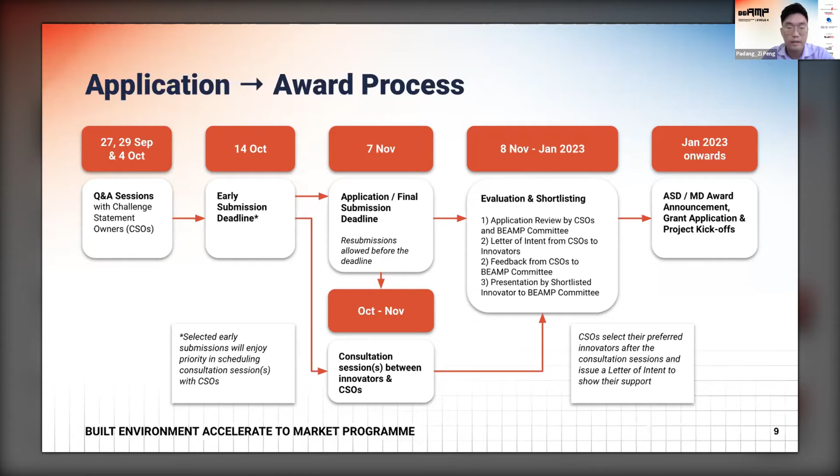There are two development tracks for BEAMP, and you will need to apply for the appropriate track depending on the tech maturity of your proposed solution to address the challenge statement. Please note that we also welcome applications from innovators with well-developed solutions, and can help facilitate direct tech matching with our challenge statement owners.

Let me explain both tracks so you understand which to apply for. If your company has just discovered the challenge statement or is in early stages of developing a solution that could address any of our challenge statements, you should apply for the Accelerate Solution Development Track, or ASD for short. The proposed scope of development for ASD should be planned to be completed within 3 to 6 months. Examples of activity include user studies, tests to ensure usability, developing prototypes or running simulations to demonstrate technical feasibility and accuracy, aligning the solution blueprint and pilot implementation plan with stakeholders, or conducting a cost-benefit analysis to ensure viability.

BEAMP will help subsidize your development costs. Funding support for the ASD track is capped at 30,000 Singapore dollars, or 70% of the qualifying costs.

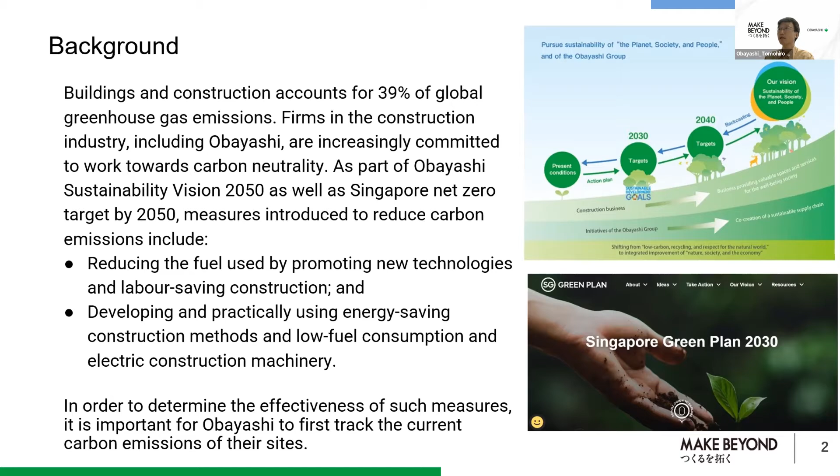Next, I would like to explain current practice. Currently, there are no established practices of collecting site-level data related to carbon emissions. When I talk about fuel purchased directly by Obayashi, we can collect data from fuel suppliers' invoices without description, so we don't know how much fuel was consumed by each machinery.

When I talk about the fuel purchased by suppliers or vendors, we can rely only on their reports, either under Scope 1 or Scope 3, which is difficult for us to judge their correctness. It is very difficult for me to justify the quantity of fuel which suppliers or vendors allocate to our site.

So to collect carbon emission data more accurately, which comes from fuel consumption, if Obayashi were to implement new practices that involve manual data collection, it would be too time-consuming, and also that data may not be so reliable due to human factors. Obayashi wants to reduce both direct and indirect carbon emissions. Indirect carbon emissions are contributed by other companies operating on our site, such as subcontractors and suppliers, which fall into Scope 3. Regardless of whether the carbon emission falls into Scope 1 or Scope 3, we consider it important to capture accurate data to determine effectiveness of measures for reducing emission.

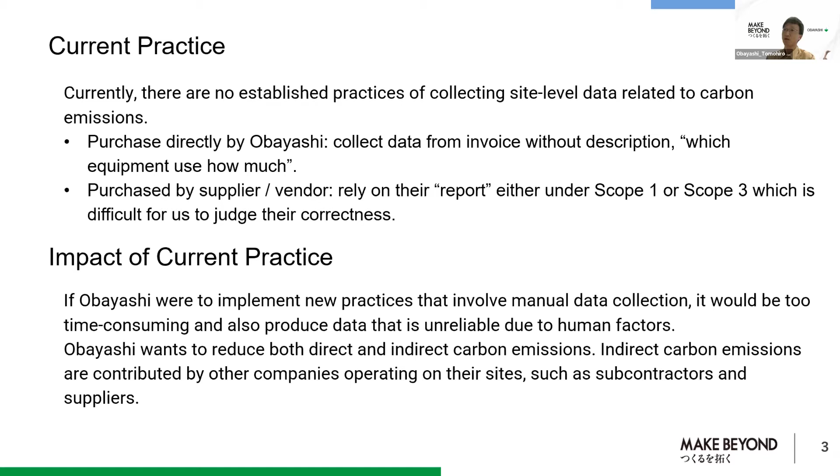The opportunity, we are interested in solutions. Interrupt, I think it's quite hard to hear your presentation, perhaps you need to speak louder. Okay, can you hear me? Yeah, better. Okay, opportunity.

We are interested in solutions that can automatically collect site-level data related to carbon emissions. The data of interest include: first, carbon emissions produced by logistic vehicles, for example dump trucks and lorries, which can be estimated by determining the number of vehicles operating on site and their fuel consumption. Second, carbon emissions produced by construction machineries, for example gensets, tower cranes, and excavators, which can be estimated by determining the number of machines operated on site, type of operation, and their energy consumption.

The solution can adopt AI-based visual analytic methods on existing site surveillance systems to collect the data mentioned above for all companies involved, without requiring site-wide modification of vehicles and machineries. We are open to adopting new surveillance systems that can support effective and accurate collection of data.

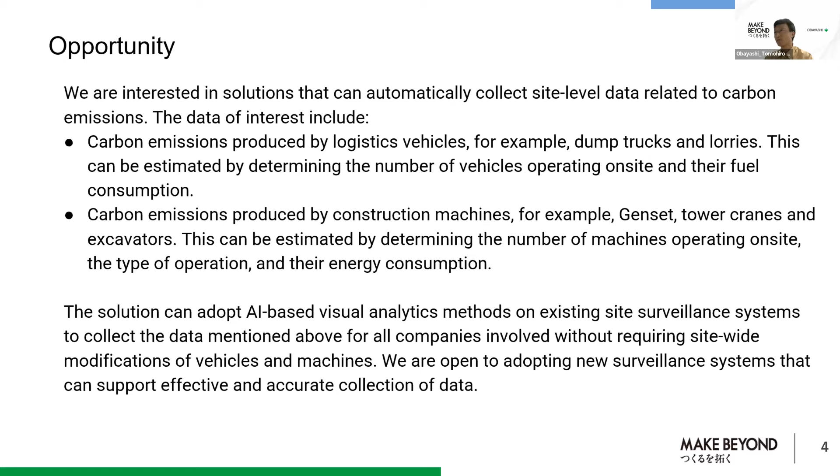In order to better plan measures and promote collective action by all stakeholders, it is useful if the data collected can generate the following insights. First, breakdown of carbon emissions based on company, which can help categorize the emission into Scope 1 and Scope 3. Second, breakdown of carbon emissions based on vehicle or machinery type and model.

Third, identification of operation abnormalities that could lead to higher emissions, for example smoke generated from a faulty machine. The solution can be integrated with project management or logistic management platforms to produce more accurate carbon emissions data on the project site. It would include a dashboard to visualize the data collected and produce useful breakdowns of carbon emissions.

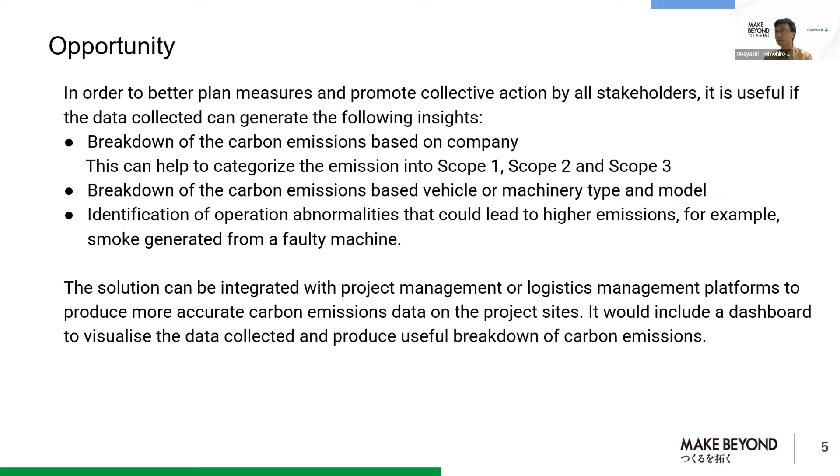Lastly, I'd like to talk about expected outcomes. A carbon emission tracking system collects and analyzes the emission data of every vehicle and machine on the whole site, regardless of its owner. Data has breakdown based on company, so most probably we can automatically classify each emission into Scope 1 and Scope 3. Also, the data will support decarbonization measures.

The solution would be part of Obayashi's effort to develop a carbon emission tracking system that can consolidate and track all our direct and indirect carbon emissions. And when this solution is used widely, it will contribute to us making proper efforts to reduce carbon emissions, not only for Obayashi, but for all firms inside our construction sector.

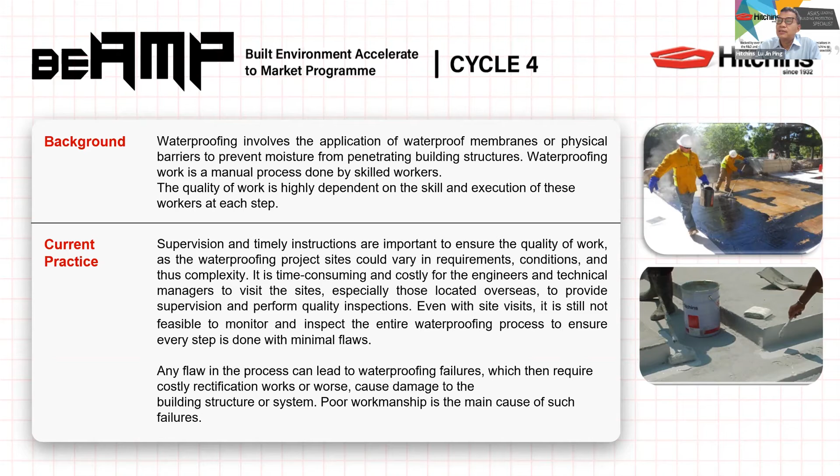So the opportunity is an intelligent remote monitoring system that enables remote monitoring, inspection, and instruction of the workers. The solution could even improve the waterproofing process to help workers consistently achieve good quality of workmanship. It will ultimately help reduce the need for our engineers and technical managers to be on site to assure the quality of waterproofing work.

So the solution we want could be an Internet of Things device installed on site, attached to the workers or both, and must fulfill the following requirements: it must be easy to set up and not obstruct or interfere with waterproofing activities, and it must be able to monitor activities for the entire surface area that requires waterproofing. It must also work for different waterproofing products.

But at this moment we are prioritizing only 3 products. The application and installation method can be found in the respective brochures. Number 1 product is Traffigard, for roof. Number 2 is Formceal 3000X, for basement. Number 3 is Formdex Uni, for wet areas.

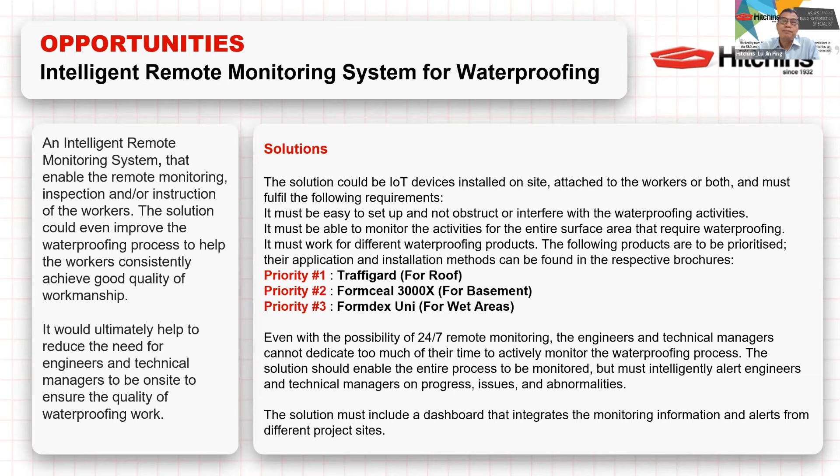So the outcome expected is an imaging device that performs real-time remote monitoring of workers performing waterproofing activities, thereby reducing the need for engineers and technical managers to be on site. The data collected is analyzed, and relevant stakeholders are sent alerts regarding progress, issues, and abnormalities.

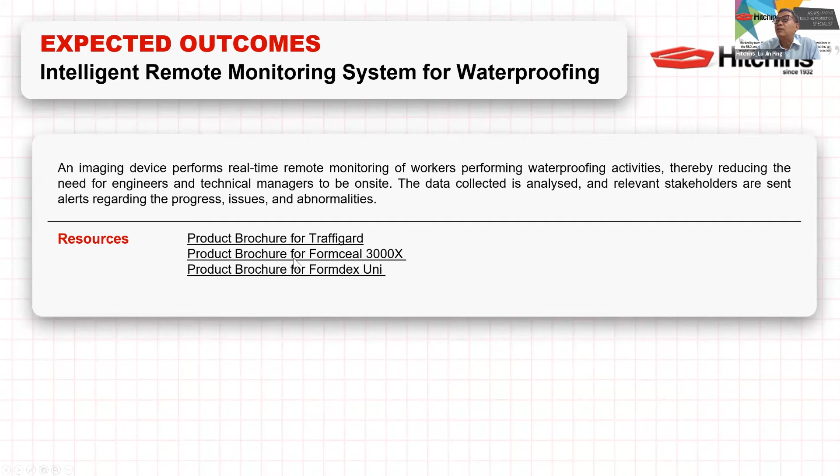So you can find the brochure of these 3 products from the link on the website, via Google Drive. I think on the BMP website this link is already available. I don't have too much time on this, but I'll try to summarize some simple application steps.

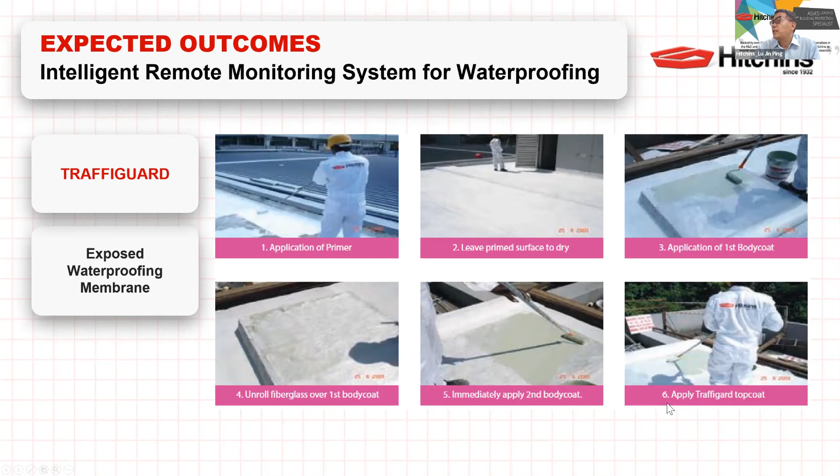For example, Traffigard: Step 1, apply primer. Step 2, leave the primer surface to dry. Step 3, application of first body coat. Step 4, unroll fiberglass over first body coat. Step 5, immediately apply second body coat. Step 6, apply Traffigard top coat. This is for Traffigard roof application.

Second one is Formceal 3000X. This one is for basement, underground projects, or tunnels. Step 1, apply bitumen primer. Step 2, laying of membrane on slab. Step 3, side and end lapping of membrane. Step 4, termination at the upturn. Step 5, laying of membrane on wall. Step 6, completion. This is product 2.

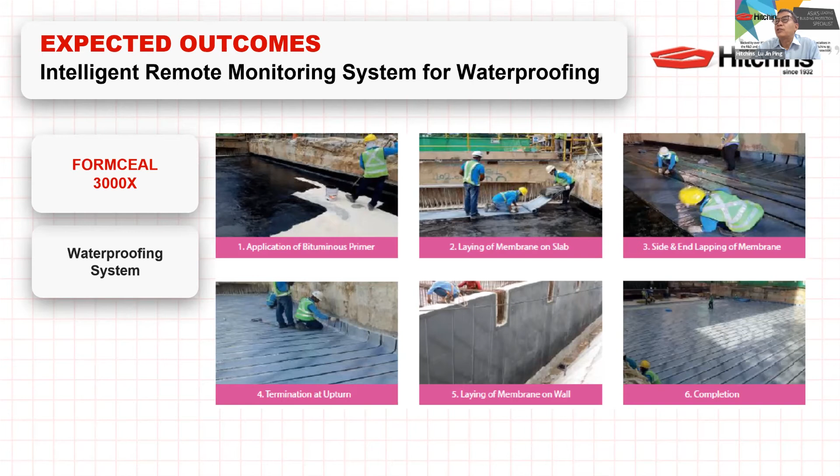Product 3, we call Formdex Uni. This is a 2-part cementitious waterproof membrane. Step 1, corner reinforced with fiberglass. Step 2, membrane applied to pipe. Step 3, termination at 300mm height. Step 4, membrane applied with roller. Step 5, membrane applied in 2 coats. Last step is membrane; some cases have to apply to 1.8 meter height, depending on the project.

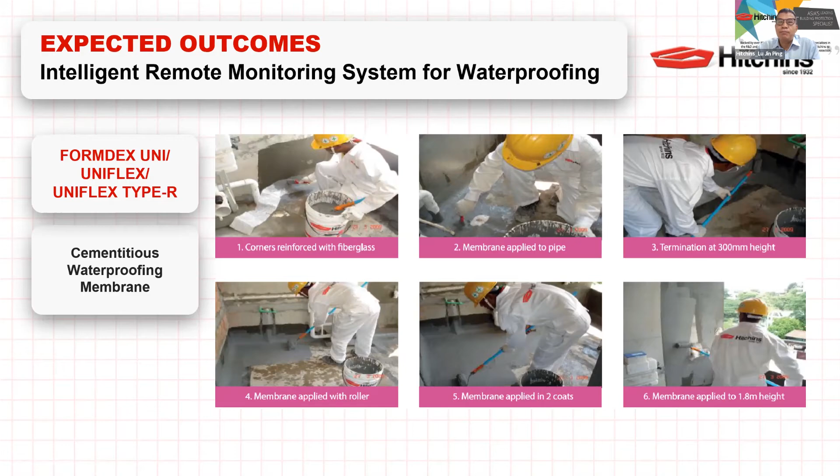Okay, this is all from me. So any questions?

Thank you, Mr. Lu. Perhaps I will ask a question of my own: what are the common workmanship issues for these waterproofing works? And just to help the innovator have a sense of what exactly they are monitoring of the workers.

Okay, well basically, for all the products we have a method statement. The problem is workers may not always follow the method statement. So a common problem is, let's say, some products we have to mix Part A and Part B. So how is it mixed? Whether mixed in the right proportion and the right time, or using the right tools, is sometimes a problem.

Second one is, you know, waterproofing is a whole integrated protection. Anywhere, if you never apply, then water will come in. So we must make sure the whole area, especially the corners and the sides, everywhere must be applied according to our instructions. For example, with some preformed membranes, we need to make sure there's overlapping and the joints must perfectly, you know, apply or protect it.

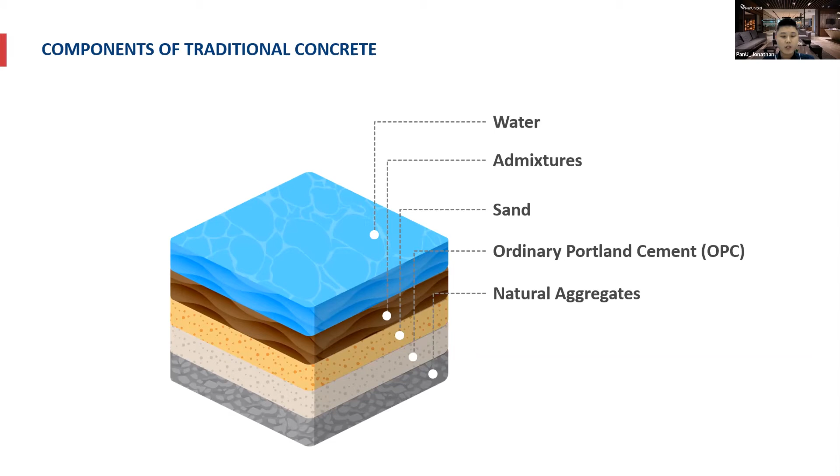Here's a little bit of Concrete 101, for people who aren't aware, since there's often confusion between cement and concrete. Cement is actually a key ingredient in concrete. Imagine concrete is like baking a cake that uses many ingredients - these are the 5 key ingredients that have been used to produce concrete up till today. To reiterate, one of the key ingredients of concrete is cement itself.

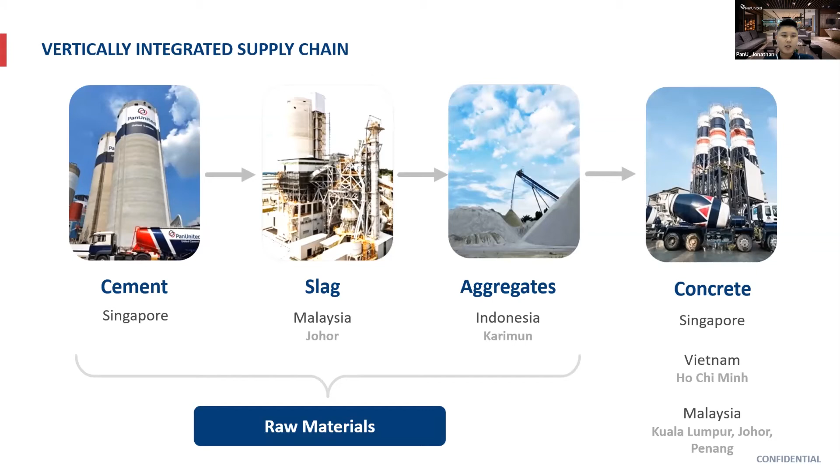Our operation covers the entire supply chain of our raw materials. On the left-hand side, we have a cement terminal located in Jurong port, where we store imported cement from Japan. Next to it, we have our slag grinding plant, also known as green cement, in nearby Johor, Malaysia. We also operate our own aggregate quarries in Indonesia, Karimun Island. Last but not least, these are all delivered to Singapore to make ready-mix concrete.

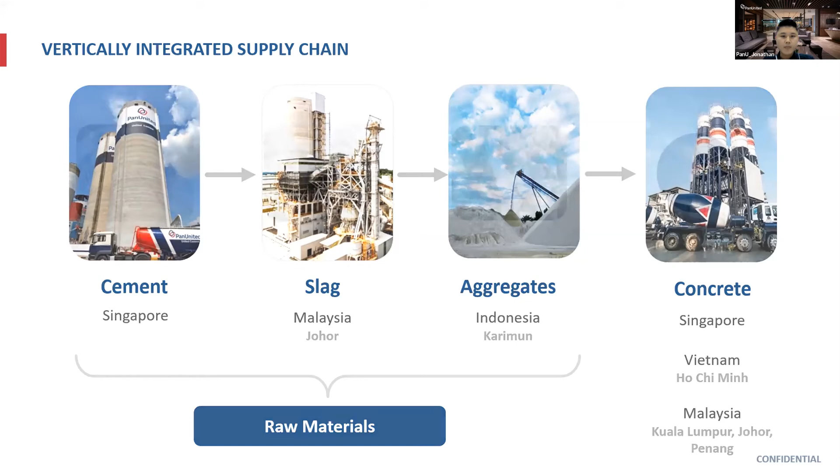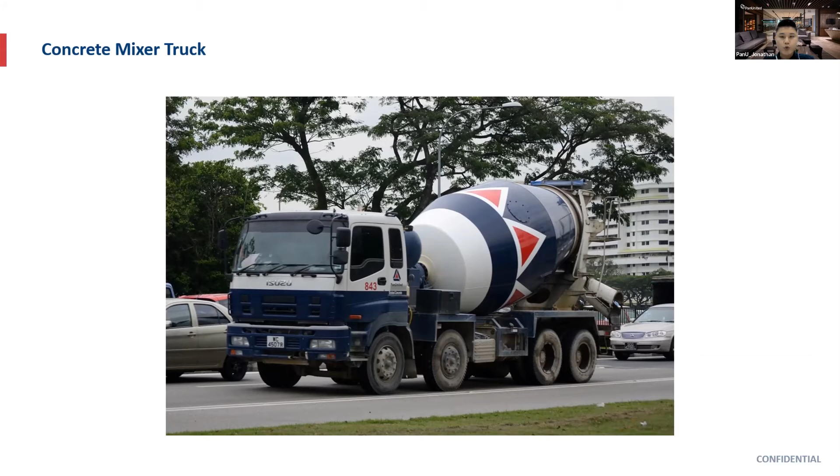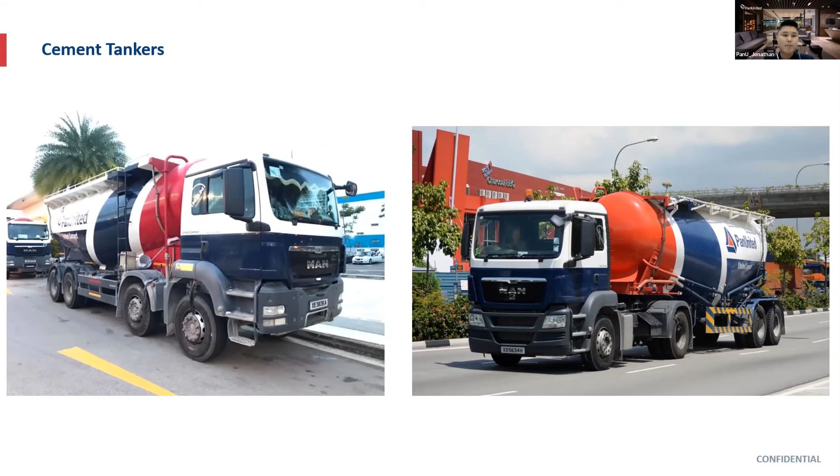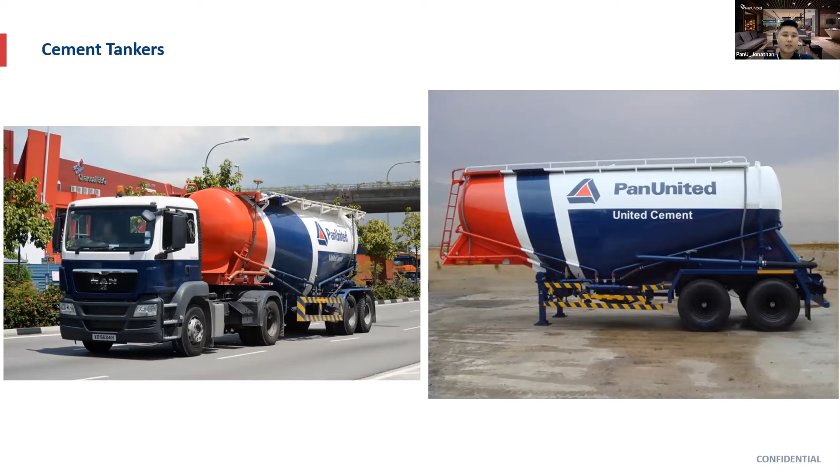Here's a snapshot of a typical concrete mixer truck. To avoid confusion, we are here to talk about cement tankers today. Here are 2 examples of cement tankers in our fleet. On the left-hand side, the cement tank is mounted on the chassis itself, whereas on the right side is a towed model - the tanker is by itself and will be towed by heavy vehicles. This is what they typically look like at our concrete batching plant, where cement is being loaded onto the silos.

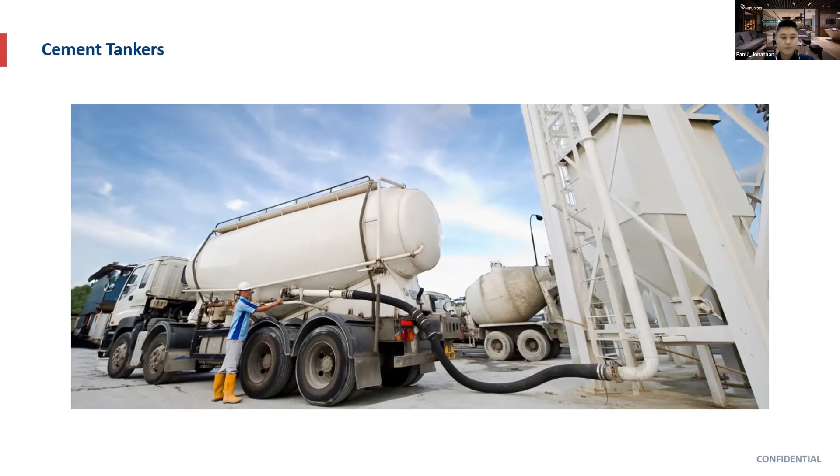Here's a typical unloading process of a cement tanker. First, the cement tanker arrives at the plant, pending whether there's a queue, since more than one material may be arriving at one point in time - there's a queue for the weighbridge. Then they take the incoming measurement, and next proceed to unload the cement onto the silos. After unloading, they queue again for the weighbridge, depending on traffic conditions and certain peak periods - materials may all come at one time, and we don't have control over traffic arrangements, especially from overseas sources such as cement from Malaysia. Last, they take the outgoing measurement to ensure what was reflected on the delivery orders is being unloaded onto our cement silos.

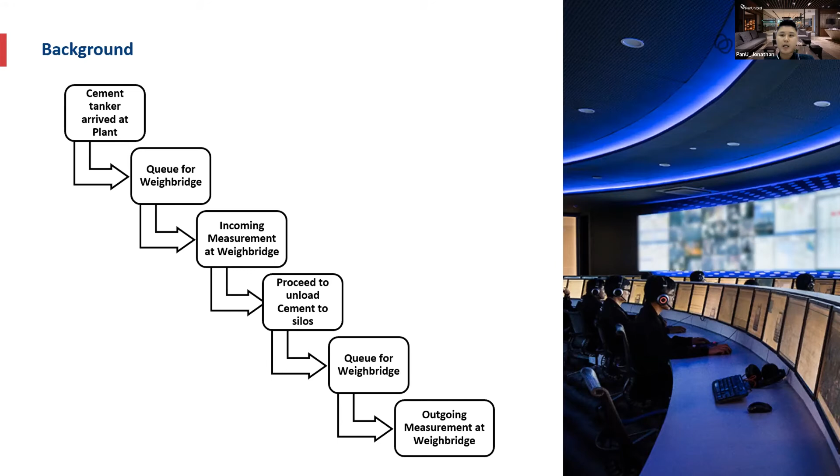To share a bit more about construction, especially in a concrete context in Singapore: the average concrete volume per year over the last 5 years ranges around 11.5 million cubic meters. In 2021, the construction demand was actually 30 billion Singapore dollars, and for the next 3 years it's forecasted to be in the range of 25 to 32 billion in average annual demand. This is largely because there are many upcoming major infrastructure projects, such as Stage 4 of the Thomson East Coast Line, our Cross Island Line, and even Changi Airport Terminal 5, to name a few.

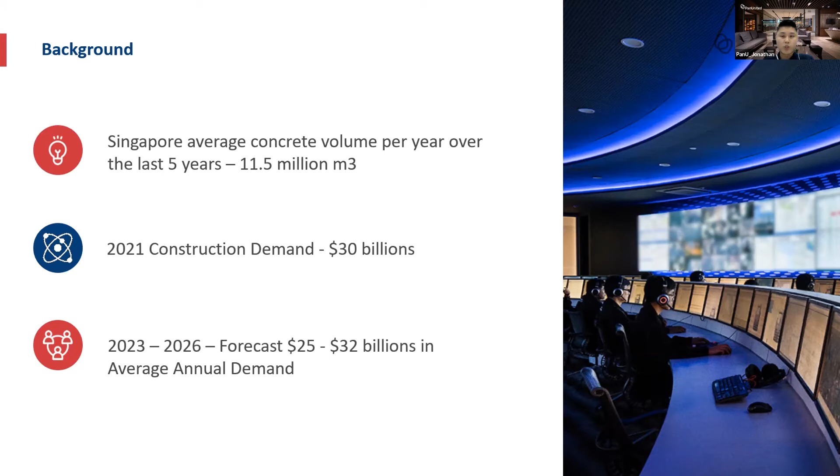So what are the opportunity areas and the key challenges that we would like to address?

First, you must be able to accurately calculate the volume of cement. Next, you should be able to identify the license plate of the tanker, as this will serve as a unique identifier. Ideally, it does not require the cement tanker to stop for measurement, ensuring smooth traffic flow in and out of the concrete batching plant. Last but not least, it should not require any installation of devices or sensors on a cement tanker, as we also purchase cement from overseas and external sources that we do not control.

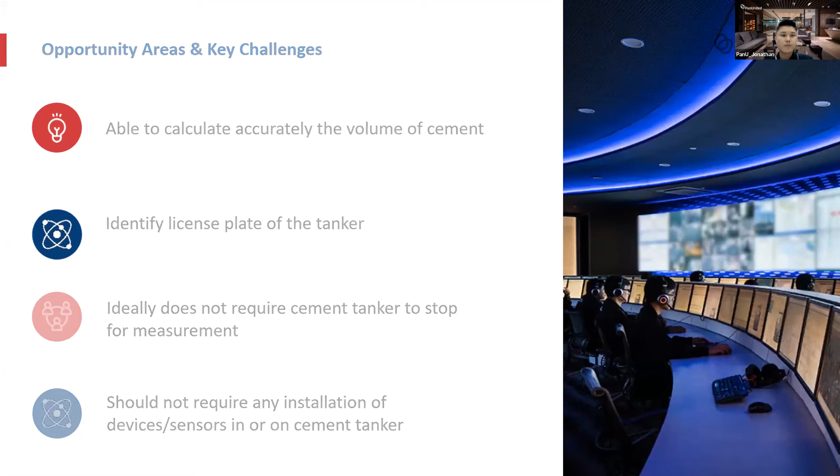In short, the solution should accurately measure the volume of cement, eliminating the use of a weighbridge in a concrete batching plant. For scalability, in the future we can consider also using this for delivery of different types of materials delivered by dump trucks or tipper lorries.

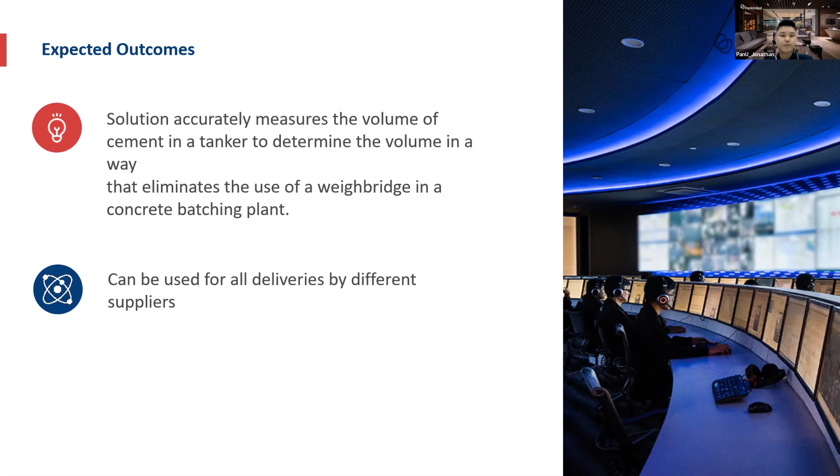So with that, I end my presentation here. Thank you.

Thank you, Jonathan. A quick question from me. For these challenge statements, have you explored existing solutions in the market? What are the learnings from exploring those solutions?

One existing solution is the X-ray radar system that ICA uses, but those are too precise and also too expensive, and last but not least, very bulky. In Singapore we also face space constraints, and much of our land is on short TOL, we do not have long leases. So ideally the solution must be able to be installed and dismantled in a quick amount of time.

Thank you, Jonathan. A question from Ivan: do you have a real-time fleet management software or live operators for concrete distribution? For concrete distribution, yes, there is - they are all monitored at our command center, and we have GPS fitted in all our concrete mixer trucks. But in this scenario we're talking about cement tankers. Cement tankers operated by Pan United Group will also have this visibility, but anything beyond our control, we will not have that sort of visibility.

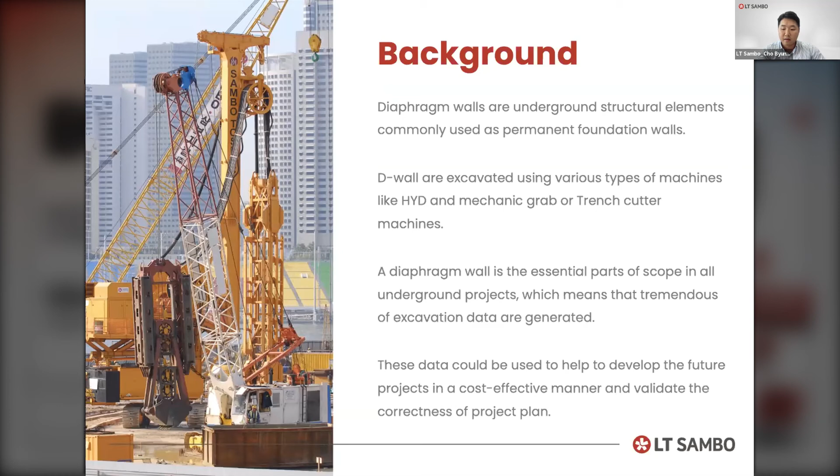As you probably know, underground construction such as bored piling, soil improvement, tunneling, and D-wall are all invisible processes underground, since we do not know what the soil condition will be before excavation. So before we carry out any of this type of work, we conduct a soil investigation to understand the ground condition for geotechnical design.

However, it cannot be completely conclusive, as we require additional data and must rely on the operator's experience and skills. The operator checks the soil condition using eye inspection and monitoring the machine's data to decide the best approach to operating the machine to carry out the excavation.

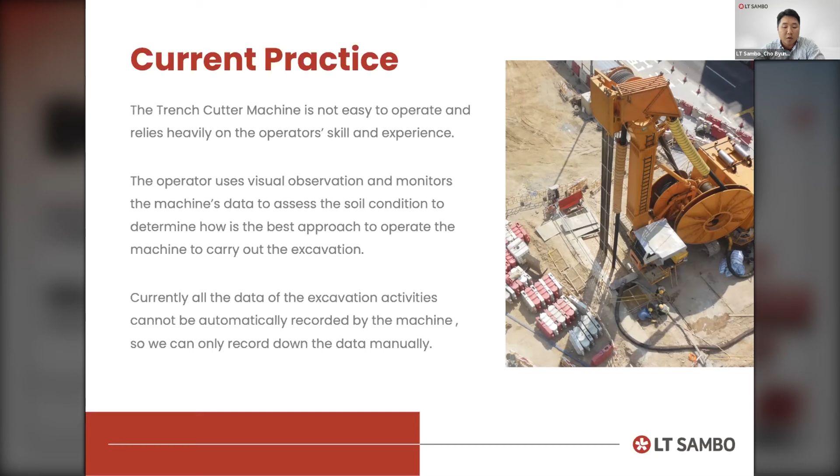For example, during excavation, if the main wire of the trench cutter, which can only be seen on the surface of the trench, is outside the lanes the operator has set up, it indicates that the verticality of the trench is out of tolerance. The operator could identify this when the monitor displays digital figures received from the vertical sensor installed on the trench cutter body.

The impact of the current practice is that the operator lacks sufficient sense of operation. So when the operator encounters tough soil conditions, such as a weak layer of ground or something like a rock layer, that differs from the data provided by soil investigation - for example, we conduct soil investigations before, then during the real excavation the data cannot be a 100% match.

So it takes longer time to excavate and causes additional problems such as trench collapse. As a result, site progress is delayed, becoming more time-consuming, and the cost is increased.

So as an opportunity - currently our LT Sambo has our own manual data collection system, such as average excavation speed or tool consumption. Tools means the tools already installed on the cutter body. Then operating hours, and which part of the machine requires repair - what kind of part of the machine we repaired before.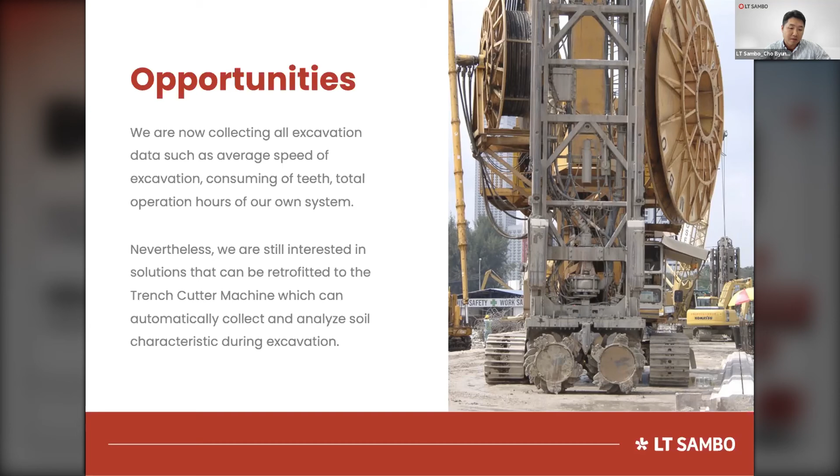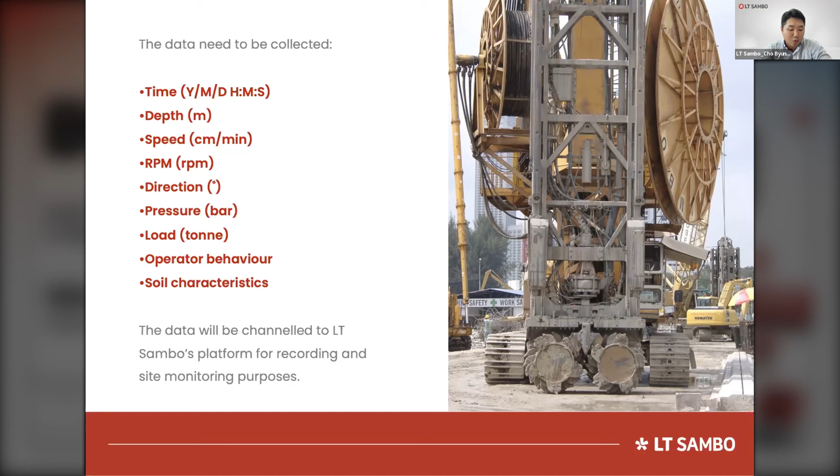So you can see the type of source we want to collect on time. These are what we learned from previous sites in Singapore - these are all crucial sources for developing automated machine operation.

With the new system, we hope to achieve the following goals. Firstly, we wish to identify soil characteristics during excavation, which can reach 100% consistency with the results evaluated in the lab, like the soil investigation result. What's more, we can predict the kind of soil based on the trench cutter excavation speed and the visible color of the soil suctioned from the trench cutter body during excavation.

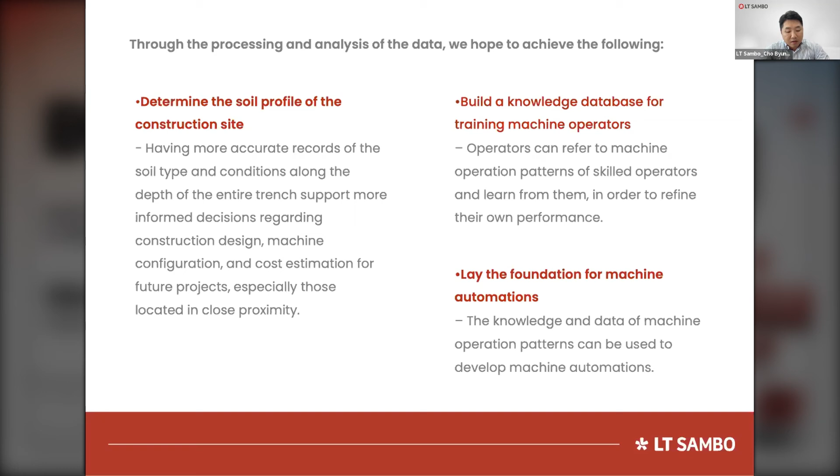As I previously mentioned, an important aspect of excavation is that it is dependent on the operator's experience and skills. So with a data-centric approach, all these new features of the new system and the massive amount of data recorded, the operator or machine would be able to understand many more instances that could occur in the future. Those could also probably aid in machine automation developing in the future.

So what are the expected outcomes for this challenge statement? As a summary of the outcomes, I would like to emphasize two points. Firstly, we must collect and analyze accurate data in order to automate the excavation, then incorporate it into the machines. As a result, it aids the project in terms of cost and time consumption, enhancing work quality and determining a better approach such as depth and structure design, along with many other things.

Second, when we arrive at data-centric automatic operations, we could use these techniques to reduce and eliminate mistakes and accidents caused by human error. That's all I would like to share today.

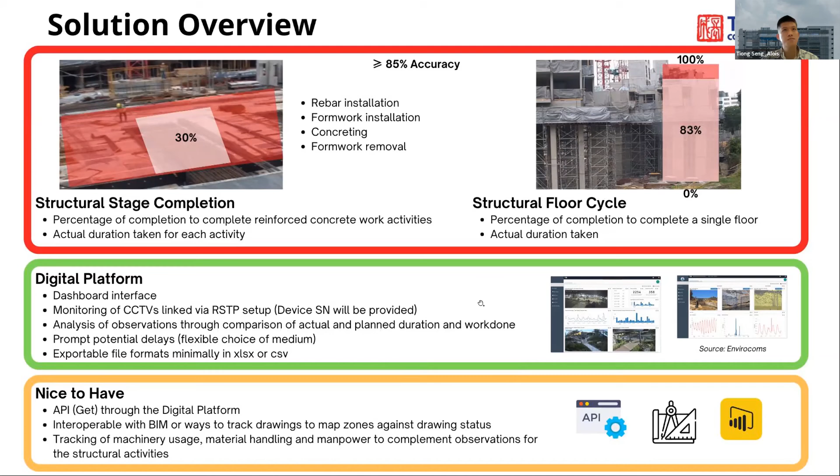Now, this is my last slide. It's more of your information. For solution providers keen to take on this challenge, we are looking at piloting the solution at this project called HL20. It is currently at the structural floor cycle stage with a 7 days KPI per floor.

So in that sense, if the solution is able to track the actual duration taken per floor, and we can compare against these 7 days, we're able to determine whether it's on time or it's lagging. Similarly, we are also tracking the stage completion at this site, mainly interested in the actual duration taken so that we can arrive at the productivity data.

Now, solution providers, what you will be getting from us if you are keen to take on this challenge is the access to the CCTVs. You'll be getting them either through web URLs using the IP address, or you can connect them using SmartPSS as you'll be given the device serial number.

Now, if along the way, during the prototyping stage, additional CCTVs are required, we can consider procuring them to install at static vantage points. My last point would be to highlight flexibility for solution providers to explore alternative methods to arrive at the same intended outcomes, as you guys may be more experienced in the technical know-hows.

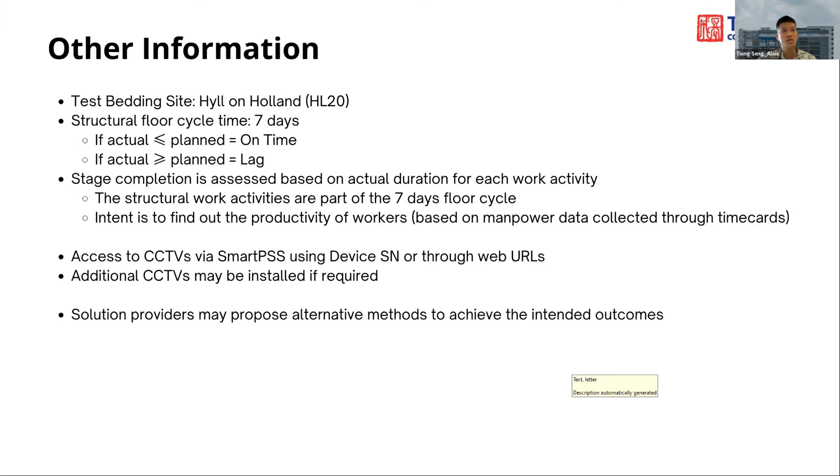Question from Ivan. Would you be expecting the solution to be fully automatic, or with some delays due to human in the loop type systems. Would you be open to one part of the solution, such as the platform, with AI that can be deployed by your in-house data science team?

It is quite a long question. Perhaps the first one, whether you expect the solution to be fully automatic or can afford some delays. I guess as a start, we can afford some delays. We are not expecting a very matured solution that is fully automatic, fully scalable at the moment. So human in the loop, I guess, is fine, so long as you are able to achieve the intended outcomes of making the informed decision to compare the actual versus plan and to intervene in time to make sure that the actual site progress for the structural works can meet the objective. That'll be great.

So I think the second part of the question, Ivan is proposing whether you're open to one part of the solution, which is AI that can be deployed by your data science team. But just to check whether you have a data science team in the first place.

I can volunteer to be the data science team. Currently, we don't really have a data science team. On my end, I can represent that part of the domain knowledge, and I have access to the CCTVs. I'm also looking forward very much to this solution, so with my interest, I'll be able to pick this up fairly quickly.

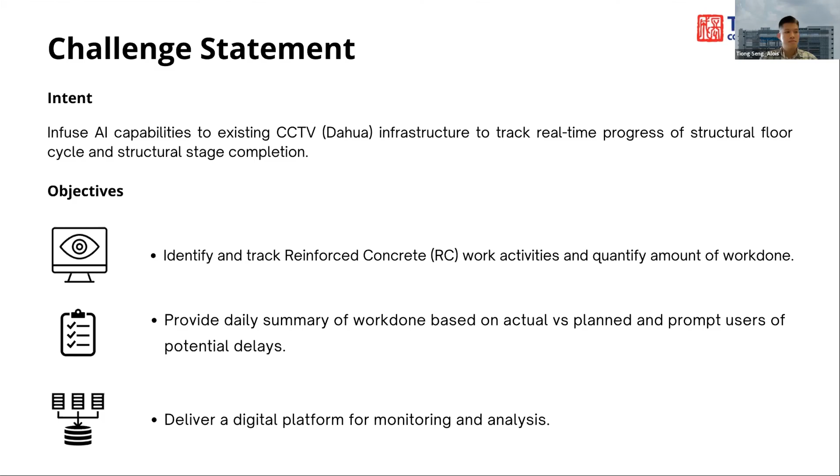So we have come to the end of our first Q&A session. I think there were some new questions coming in, even after the presentation, and with that, I think we can spend a few minutes to further address those questions.